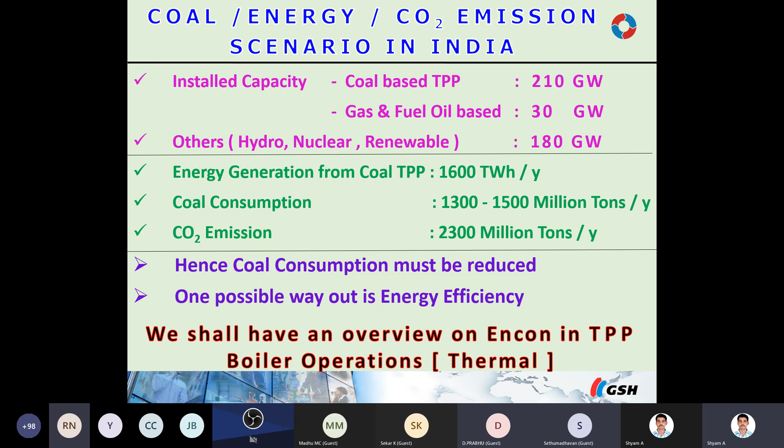We go on to the next one: way forward to achieve energy efficiency. One, establish the actual performance of the boiler in terms of thermal efficiency. Quantify various heat losses associated with boiler operation. And of course, make efforts to minimize the losses and sustain it. Total elimination is not possible, let's understand that.

So the idea is, let's try to establish the thermal efficiency of the power plant boilers, and once you do that, you will be able to understand the types of losses that take place, and also quantify the same. Once quantified, I think we can make our sincere efforts to reduce the losses. As I said, the losses are an inherent part of the system, so they cannot be made to zero. We shall try our best to minimize it.

So once that happens, naturally the coal consumption would come down, and once it comes down, you all know that emission is also going to come down.

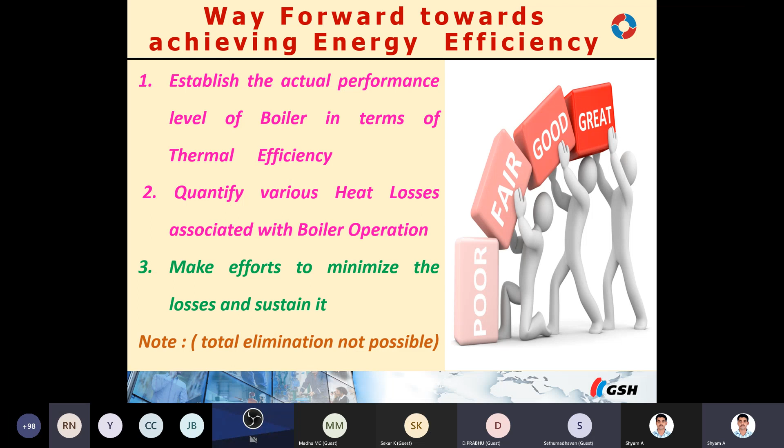Now these boilers are classified: high pressure, medium pressure, and low pressure. We will be talking about high pressure boiler thermal power plants. Whereas when you are talking about cogeneration sugar mills, they come under either MP or HP. I say MP or HP because the older versions of cogeneration boilers operate around 65 bar, that is 20 to 80 bar range, medium pressure. Of late, even the cogeneration boilers are getting designed for high pressure steam, so they come in 80 bar and above.

And the LP, that is 20 bar and less, they are all called low pressure, and they are basically classified as process boilers for process industries, where you need saturated steam for process application. In saturated steam, you all know that latent heat is higher and they are not getting superheated. So the maximum thermal energy conversion happens at the LP boilers.

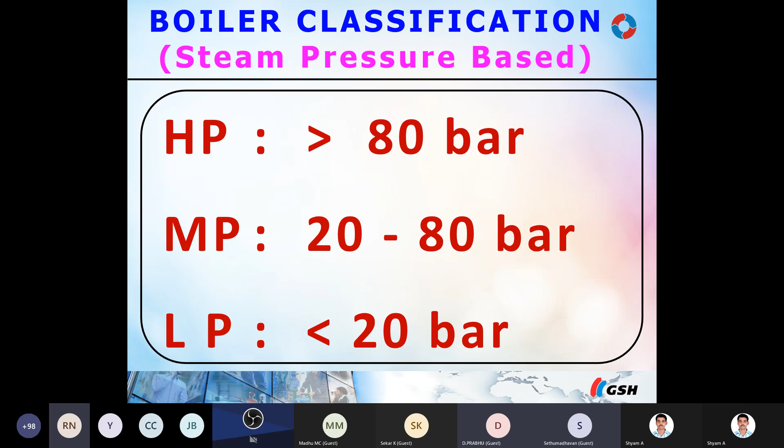So our focus is now going to be on HP-MP boilers, that is power plant boilers. This is a typical boiler circuit. This can be applied even to process boilers. You have the boiler, fuel coming from the storage yard, and then we have the water circuit.

Like you can see the condensate tank on the left hand side, then you have the deaerator, you have an economizer, and on the right top, steam to the facility. And flue gas path, you can see the FD fan. Then the flue gases go via the economizer, then you have pollution control equipment, and then to the stack.

So there will be 3 or 4 distinct circuits in the boiler operation, be it process or power plant, and each circuit has to be separately dealt with to understand their efficiency of operation. Once that is understood, I think we are done in terms of understanding the possible efficiency enhancement in the thermal operation of the boiler.

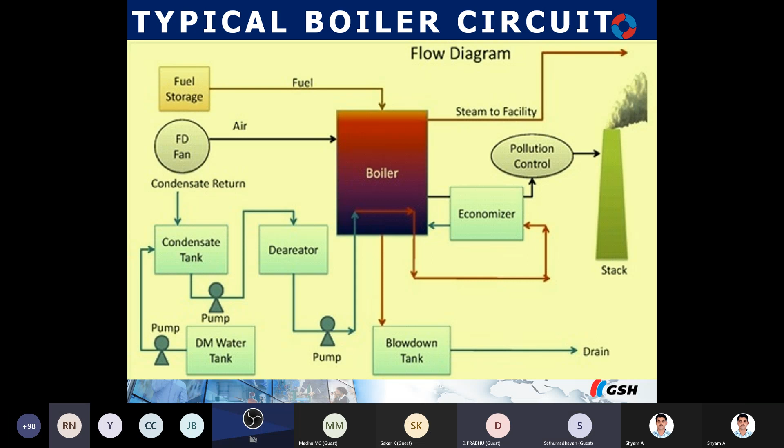Yeah, this is the other way of looking at that. You can see that the dotted ones: there is an air circuit, there is a fuel circuit, there is a feed water system, and there is a stack circuit. Because each one has a role to play. We all know that basic stoichiometry talks about supply of oxygen for the fuel.

Fuel we call it because it has energy content in it, what we call as calorific value. The calorific value comes from carbon and hydrogen present in the fuel, and that's why we call it hydrocarbons. When the hydrogen percentage is substantial compared to carbon, then the fuels are very specifically designated as hydrocarbons.

That's why we see all the petroleum fuels termed as hydrocarbons, because they go through the refining process and come out with gases like C1H4, what you call methane, C2H6, C3H8, C4H10, C5H12. These are all hydrocarbons like methane, ethane, propane, butane, pentane, hexane, so on and so forth. So that is the fuel.

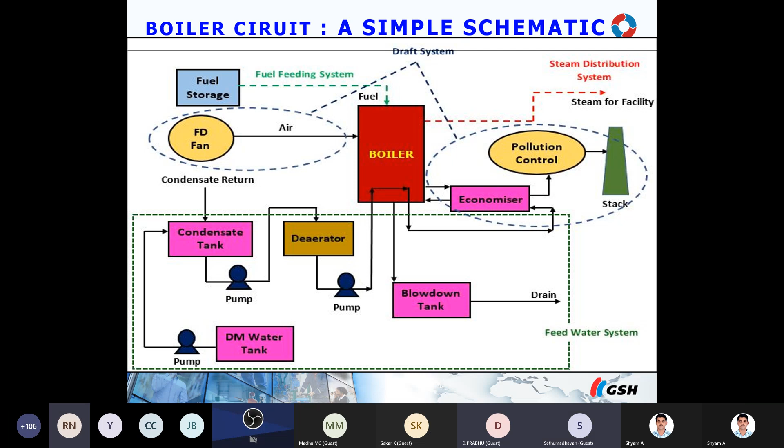So this is how the overall system would look like. Again, you can see that the superheater is another thing added to the power plant, and there is a turbine. Superheater is another system which you will find very specifically in the power plant boiler, not really in process boilers.

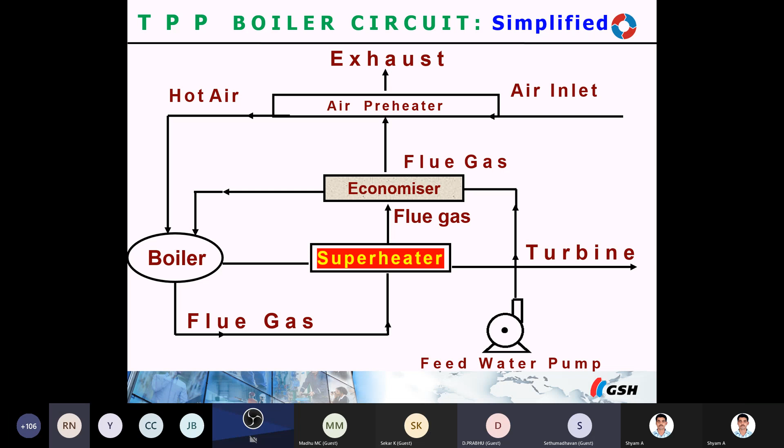And this is the extended version, and here if you see, I have mentioned this as the flue gas circuit. As I said earlier, the energy loss in combustion is mainly due to the energy going out in the flue gas. And of course it cannot be made to zero. We need to ensure that the energy going out of the circuit is the minimum. For example, you can see there is the stack, and from the stack we should get the flue gas, not only in terms of quantity but also in terms of quality, that is, the unburns as well as the temperature, they should be at an absolute minimum.

Unburnt content should be as low as possible, and of course the temperature should also be as minimum as possible, so that it doesn't affect the chimney. If that is taken care of, I think the performance of the boiler would certainly go higher. And if you see the flue gas part, there is an economizer, there is an air preheater. Then we have the ESP, you can see a box-like thing, that's the electrostatic precipitator. These are all very specific to power plants. And then we have an ID fan and a chimney. Why specific to power plant?

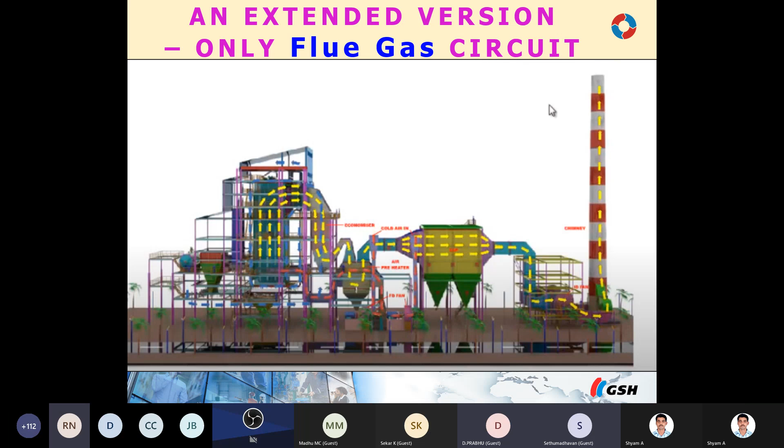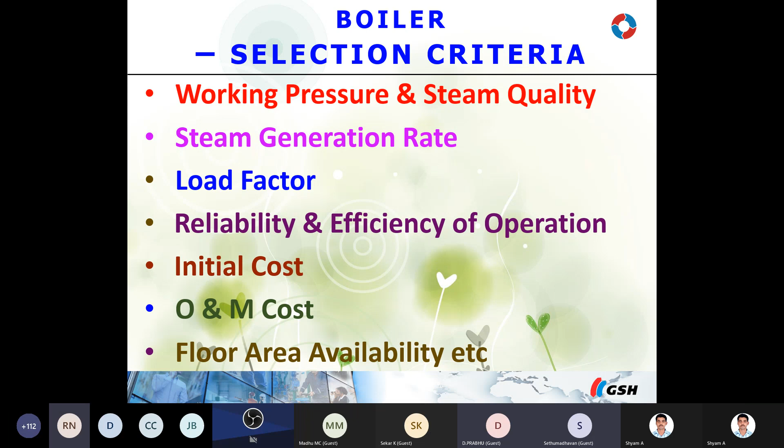Now the fundamentals required to understand boiler performance are: first, combustion chemistry of fuel; second, the fuel composition; and third, the steam properties and terminologies normally used. The combustion chemistry is also going to give you information about the flue gas. If these three things are understood, we may be able to proceed further in understanding the performance level of boilers, or the way to evaluate performance.

And again, I emphasize on focusing a lot on the fuel and the combustion, because if these two are taken care of properly, it is quite likely that your efficiency of operation would be much higher. The fuel is an important part of a thermal power plant, and not only thermal power plant, even for process industries. Process industries too generate steam, and the steam goes for various process operations.

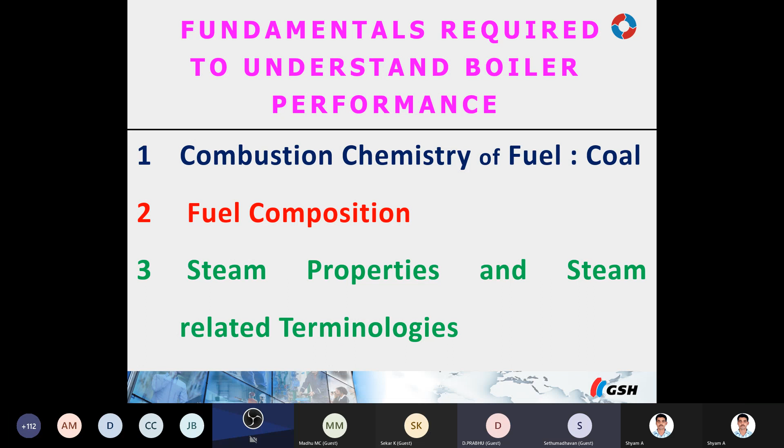Normally about 7 to 10 days of inventory is kept in a power plant. You would have read in the newspaper recently that there's a shortage of coal, and only 2 or 3 days of availability remains, etc.

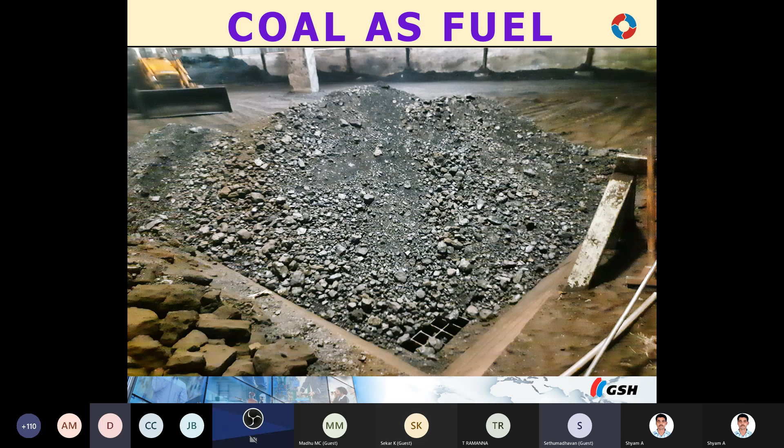So this is the coal as a fuel, and this is how the transportation takes place, normally by a belt conveyor. You must be wondering what is the need to show this. As I said, in coal combustion in a power plant, tons and tons of coal will be stored in the yard, and there will be losses in handling, which also go into the account of overall usage.

So the boiler may be efficient, but still your coal consumption could go higher because of improper, poor handling. There will be checkpoints in the power plant everywhere to ensure that coal is not wasted, or what they call spillages, or to be precise, carpet loss. These losses -- the coal not going into the boiler -- have to be kept at a minimum, normally 2 to 3% is allowed.

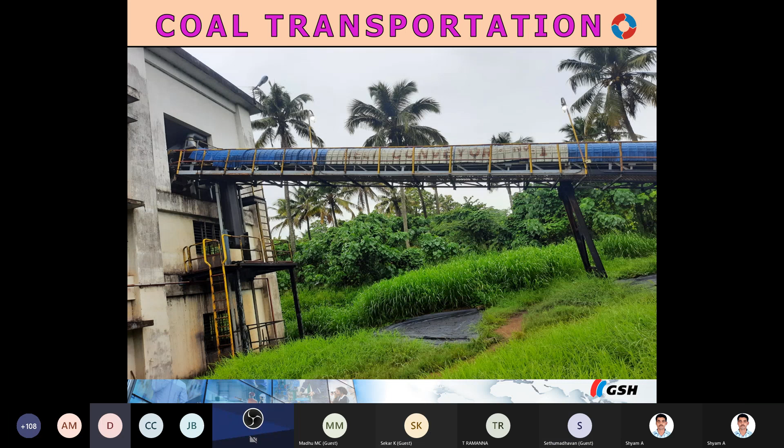You can see this is a belt conveyor, how neat it is, and on the sides also it's kept almost absolutely neat on a daily or shift basis to ensure nothing is lost. Another aspect to understand is the belts are made out of rubber, and spillages could be a fire hazard. They are in a closed system, so heat generation can happen, and once it catches fire, the belt gets damaged. Once the belt is damaged, fuel transportation cannot happen, and that can hamper the boiler performance.

As a practical engineer, we need to give consideration to all the aspects, not only the combustion part of the fuel. This is a typical example - you can see an absolutely clean environment is maintained around the coal belt, or the coal handling plant, to ensure that wastage is minimum and fire hazard is also mitigated.

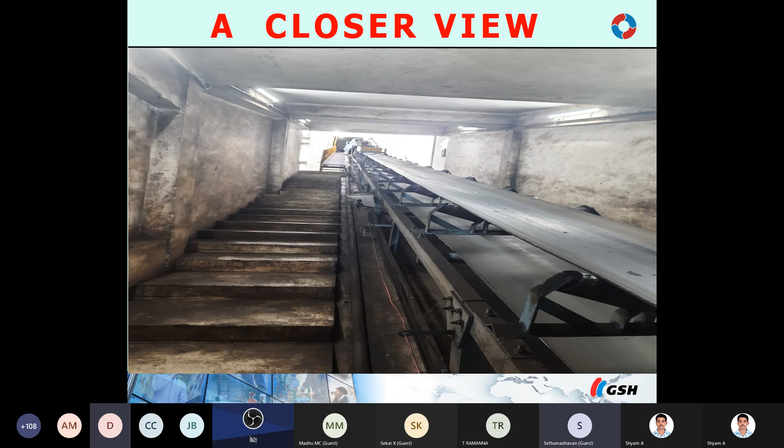This is the bunker, and there will be many bunkers depending on the size of the boiler, and these are all mechanically operated. The operation and maintenance of all these rotating machineries is again an important aspect, because the whole machinery operates in a dirty atmosphere with powdery fuel, and that could be a fire hazard. Second, it also makes the equipment operation bit sluggish, which can lead to motor coil burning, heat generation, and lesser heat dissipation.

There can be many things, and each and every part of the power plant is very important, so it is equally important that housekeeping is done very effectively so that performance is maintained. For coal feeding, right from the JCB up to the coal feeding, everything has to be in a clean atmosphere and has to be cleaned. If you visit a power plant, please do make a visit to the coal handling plant, not only the boiler, and look at the surroundings to see how clean they are. This indirectly helps the performance also.

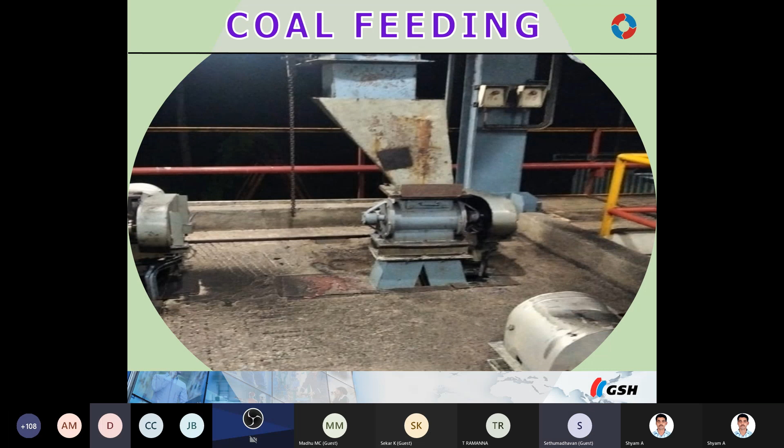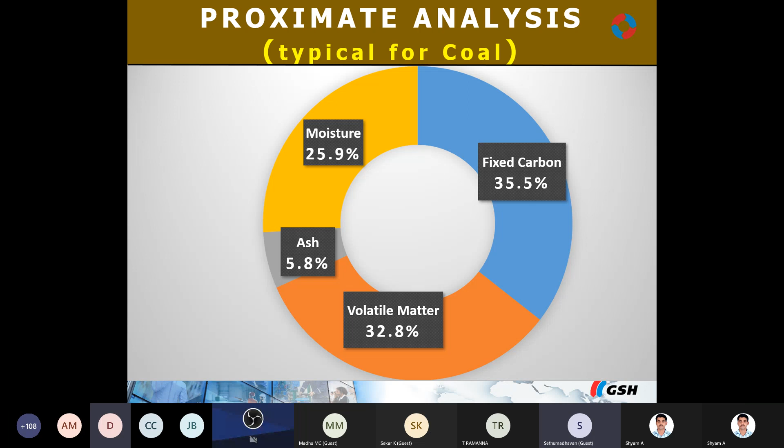Now coming to the coal - since you are all teachers, you must be knowing what is called proximate analysis, and the other one is ultimate analysis. The proximate analysis talks about the fixed carbon, volatile matter, ash, and moisture content of the fuel. Ultimate analysis, as the name suggests, breaks them into individual components like carbon, nitrogen, oxygen, sulfur, ash and moisture.

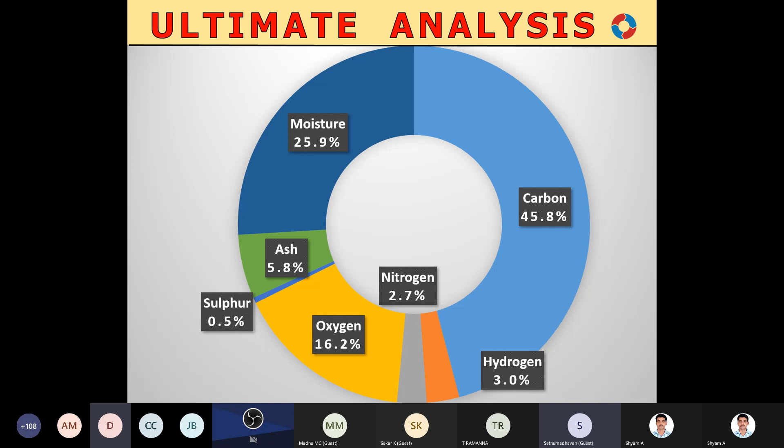This is for a typical coal sample. What do you mean by typical coal sample? It could be coal from any source - we will be seeing it a bit later. There are many terminologies used to define the quality of coal.

As received, air dried, as determined, ash and mineral matter free, so on and so forth. The moisture also has surface, inherent and residual moisture. Ash and volatile mineral matters form the overall mineral matter, and in the volatile you again have the organic. So there are many ways of defining a coal.

Many ways of defining a coal. The emphasis is more towards understanding the coal properties, because in power plants tons and tons of coal are being consumed, and the coal is also being procured in large vessels, I mean ships, and the smallest ship would be able to carry about 100,000, one lakh tons of coal.

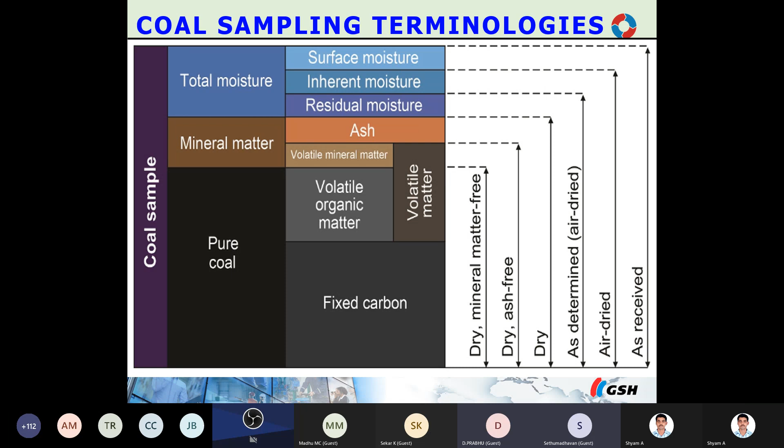So coal is well defined by the supplier as well as the user, and based on that they go for the purchase. There are 17 grades of coal, specific for power plants, from G1 to G17. G17 is as low as 2200 kilocalories per kg, and G1 grade could be 7000 and above.

So the question is, what is it that we are talking about? Which coal? Is it G1 or G5, G11, G14? And it varies from mine to mine as well as from country to country.

It's also obvious that the lower the calorific value, the lower will be the cost. When the cost is lower, of course, the quality is low, so steam generation also will be low, that is, the steam-fuel ratio will be less. So you may not get any cost advantage.

And many a times it may not be our choice on coal quality, because we need to buy what is available, since the quantity required is tons and lakhs of tons per year. So we need to live with what is available, considering the quality as well as the quantity, and try to improve performance with the given fuel quality.

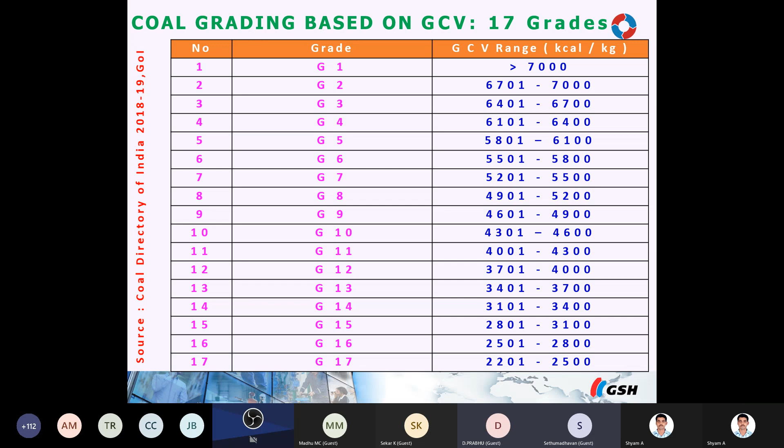You can see the table. Basically these are the 5 sources of coal as far as India, or rather Indian power plants, are concerned: Indonesian, South African, Australian, USA, and Indian.

Total moisture and ash content are very important parameters. Ash is one of the deciding parameters, because when the ash content is high, the energy transported per ton becomes lesser. When the ash content is high, the load on the dust collection equipment goes higher, which also consumes energy, and ash disposal becomes a nuisance to be taken care of. So industries look very seriously at the ash content.

The second one is moisture content. It's not as critical as ash, because moisture can be added or removed. A fluidized bed boiler can normally take up to 30% moisture and burn the fuel effectively, not a difficult task. If you see, ARB stands for as-received basis, and ADB stands for air-dry basis.

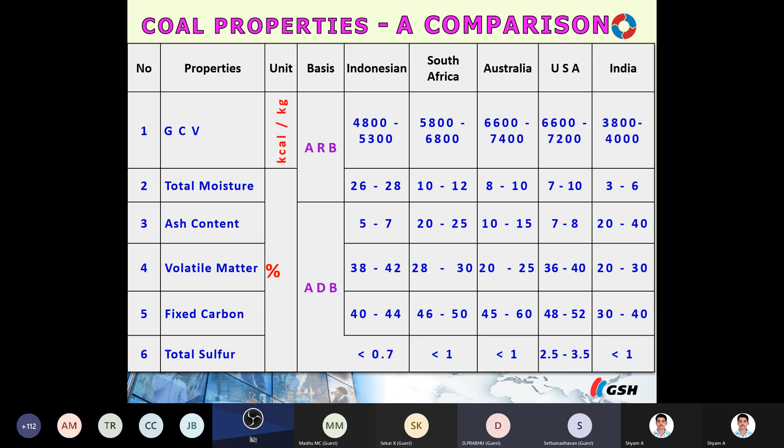So right now in India, Indonesian coal is used to a very high extent, and this is where, as you must have read about 2 months back, the crisis came, because all the Indonesian coal was being purchased by the Chinese government. So coal prices, you will be surprised, the Indonesian coal used to be about 5,500 rupees per ton, had gone as much as 15,000 rupees per ton.

And of course now the prices have softened to 7,000, but still not back to the level of 5,500. All power plants were finding it extremely difficult, and then they started mixing with Indian coal, although it has lower calorific value and high ash content, but still the cost was the factor. So it was mixed with Indonesian coal, and right now the situation is slowly coming back to normalcy. If you really look at it, Indonesian coal is the most preferred coal as far as Indian power plants as well as process industries are concerned.

This is the typical composition, which we call GAR. GAR is the terminology normally used by coal dealers and coal purchasers. GAR stands for GCV as received.

GCV, that is gross calorific value. A stands for as, R stands for received. So there are two grades as shown here, and there is one more grade, 5,200 GAR also. The calorific value GAR, 4,500 GAR, means it will have a GCV of 4,500 kilocalories per kg, and this is the moisture content, ash, volatile matter, so on and so forth. So this is how the coal is being selected.

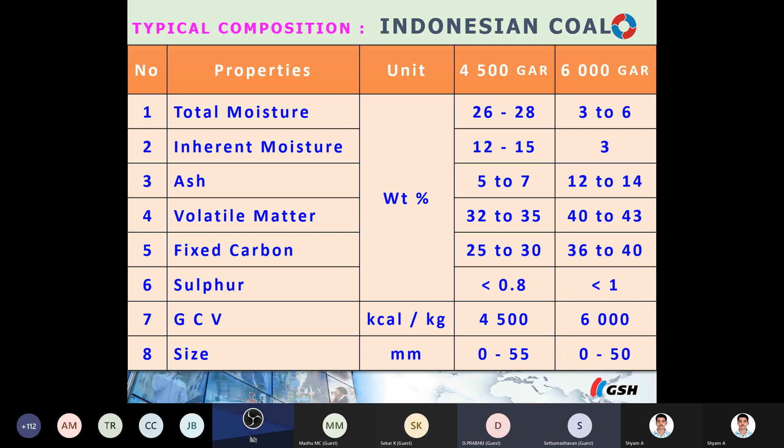And this is the typical representation. You may be thinking that I am spending more time on the coal or fuel related aspects, because I know that this is the most important parameter in a power plant operation. If the coal is not of the right quality, then you cannot achieve the efficiency.

So we also insist on all the power plants that before we go for the audit or before we certify the efficiency level, we completely get the parameters of the coal purchased.

Again, the coal purchase would go different quarter wise, because normally the coal prices go by the coal index in the international market, and they're all fixed for only one quarter basis. Every quarter there will be a change in the coal price, and when the coal price changes, the commercial department of the power plant may look for a cheaper coal because they would like to freeze the cost, so they may go for a cheaper coal. And you all know that when you go for a cheaper coal, the performance gets a hit.

So when we do the energy audit, we not only look at the process parameters and efficiency of boiler operation, we also get the analysis of the coal and type of coal used, and cost of coal used in the previous 12 months minimum. We normally go for 24 months, based on which we try to establish the performance.

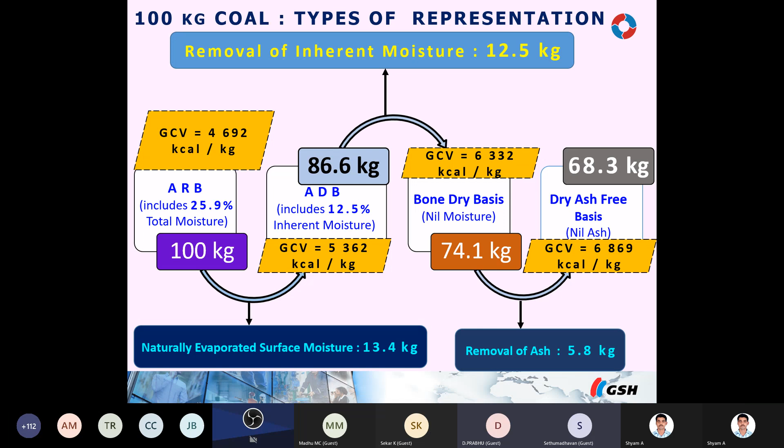In addition, moisture also can get added, because mostly coal is transported from country to country by sea. While shipping, it has to travel days and days on sea, and moisture pickup will be there. So normally it's at the port at which it is unloaded that the sample is taken and the performance is analyzed, based on which the cost is fixed. So moisture can play a role in coal cost as well as performance. As moisture content increases, the calorific value comes down, which of course all of us know.

Then come to the combustion aspect of that: the excess air, stoichiometric air, and substoichiometric air. As far as combustion is concerned, it is more the excess air that goes into the combustion.

Substoichiometric air is used for the gasification process, where we don't supply the required quantity of air but some percentage of the theoretical air, less than 100%. Stoichiometric air is the right quantity, 100%. Whereas in actual practice we incorporate a safety factor, so if 100 kg is the theoretical air required, we may supply more than that.

This excess depends on the type of fuel - not only quality but whether it's gaseous, solid, or liquid. Solid fuel calls for higher excess air, about 30 to 40%, as low as 5 to 8% for gaseous fuel, and about 20 to 25% for liquid fuel.

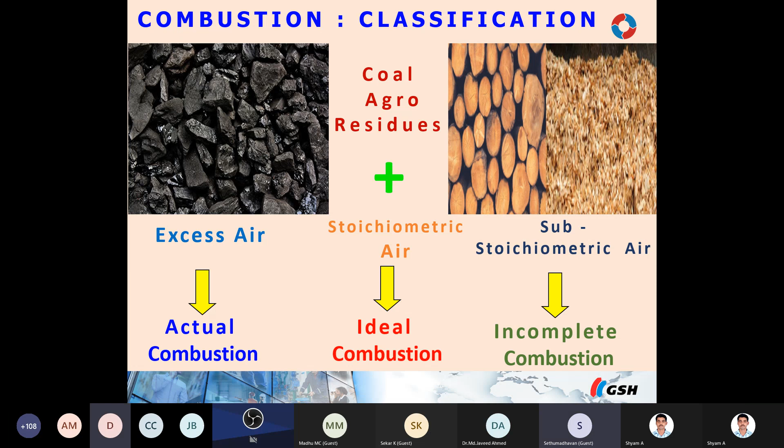Here you can see a visual observation. Complete combustion is almost colorless, but in fact it should be slightly hazy brown - it should not be completely colorless either. Colorless says combustion is good, but it also means excess air is on the higher side.

On the right hand side, it's an incomplete combustion - you can see black smoke coming out. The black smoke is nothing but the presence of carbon, which indicates that energy is lost in the flue gas, goes unburned, and also results in pollution of the atmosphere.

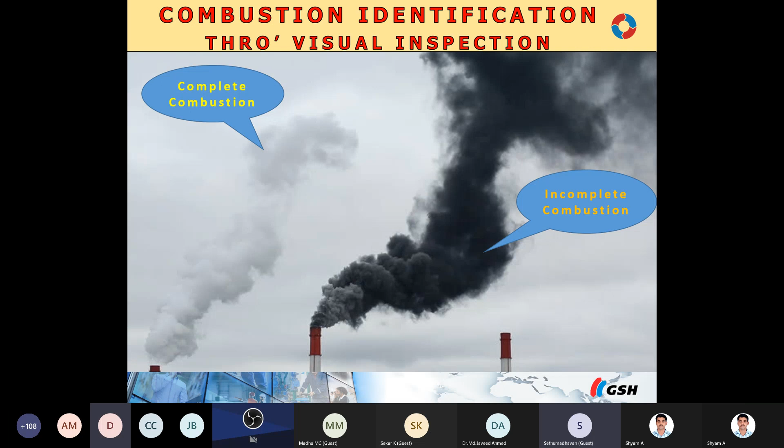Now the steam related aspects. We've seen parameters related to coal selection, and combustion related aspects, especially excess air. The third input parameter, since we've talked about coal and air, is the water that comes out of the boiler as steam. Let's see the steam related parameters - one is the equivalent evaporation.

You must have seen this in second or third year heat transfer, power plant, or boilers courses. It is the quantity of dry saturated steam generated per unit time - second, minute, or hour - from feed water at 100 degrees centigrade to the saturation pressure corresponding to 100 degrees centigrade. This is equivalent evaporation, also called from and at 100 degrees - the terminology normally used on the boiler nameplate. If it says 10 TPH, 10 tons of steam per hour, that's what the nameplate indicates.

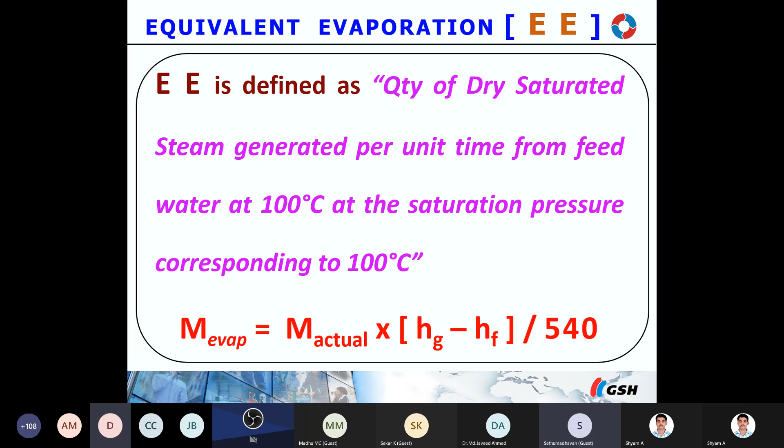The nameplate suggests information under standard condition, whereas that has to be modified to the operating condition. This is what we call equivalent evaporation, and this is the factor of evaporation, based on steam enthalpy and water enthalpy. If water is at 40 degrees centigrade and steam is at 170, the energy required would be 660 kilocalories, not 540. So the steam generation would be 540 by 660, maybe 80% of the nameplate steam generation. So a 5 tons boiler can give you only 4 tons. We need to understand this equivalent evaporation as well as the factor of evaporation.

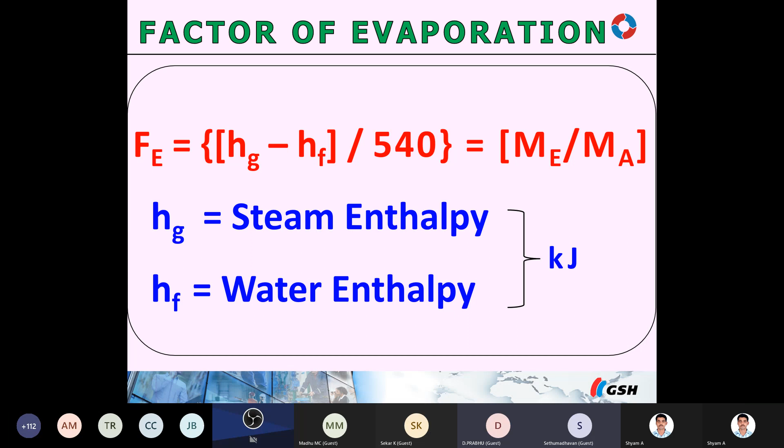Now comes the key performance indicators. Of course, you may not find this in the typical textbook, but these are all quite relevant to industrial application.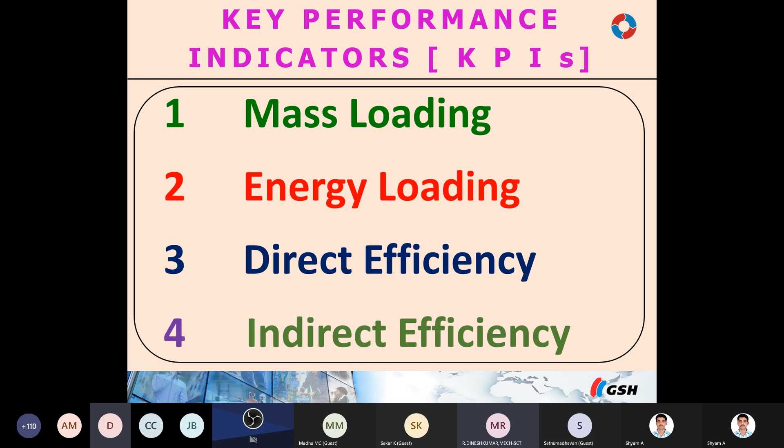Now, what is mass loading? Mass loading.

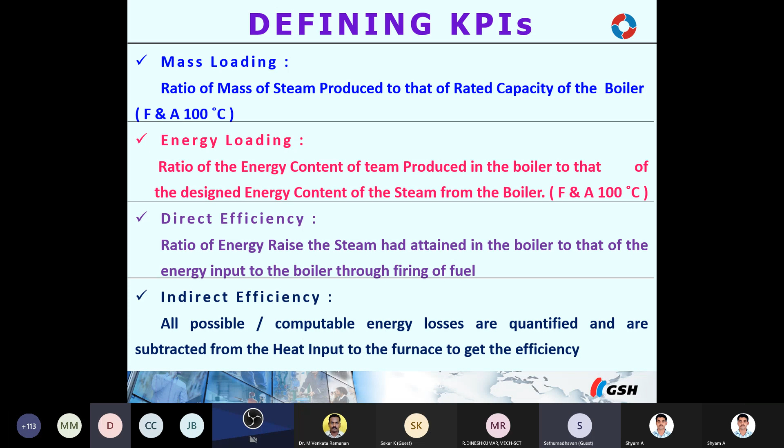Coming to mass or energy loading, which one should we follow? Mass loading is not the right indicator, and energy loading is considered the right parameter, the true indicator of the boiler loading pattern. This all of us should be very clear about, because mass loading from and at 100 degrees centigrade of the boiler rating is meant only for selection of boiler. With that, its usefulness stops. Whereas in reality, we need to understand what is the energy being delivered by the boiler.

Here again, slightly different, or not found in the textbook. Steam is nothing but a carrier of energy, a courier also we can call it. Its job is to capture the energy of the fuel, that is the coal GCV, and take the energy to the user point, dump the energy there, and come back to the combustion zone, again pick up energy, go back, give it, come back. So steam as such is nothing but a carrier of energy, and the more energy it carries, the higher would be the capacity of the boiler.

We are not really interested in the quantity of steam, but the quality of steam, or the energy content of steam. Energy content of the steam should be high, that's why we go for superheating also. So what really matters is the energy that is getting transported by the steam. Energy loading is the true indicator of the loading pattern of the boiler, not really the mass.

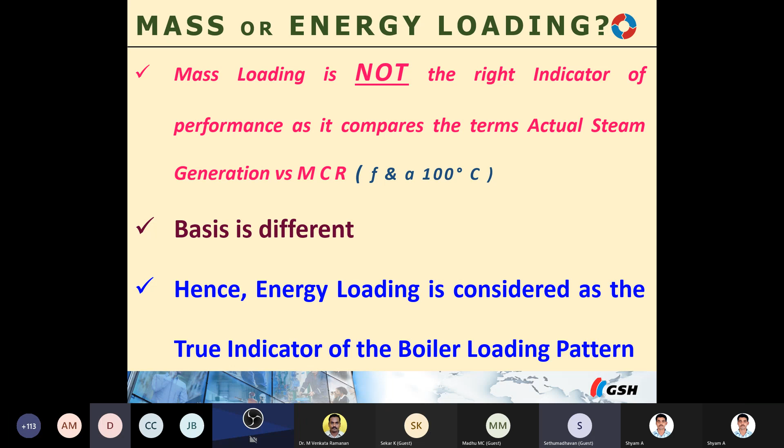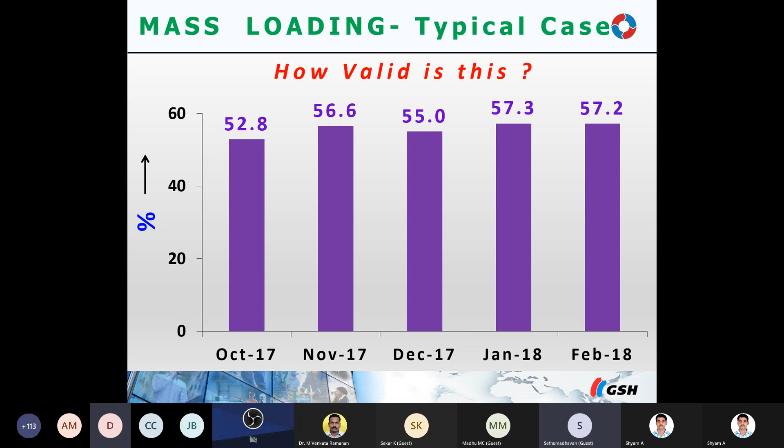If the boiler is poorly loaded, the efficiency also will be less, because when you do the loss analysis, you will see that the loss becomes 25%. Then you say efficiency 75% is low. Yes, 75% is low, but a partial reason would be loading of the boiler. So the energy loading has to be evaluated by the boiler.

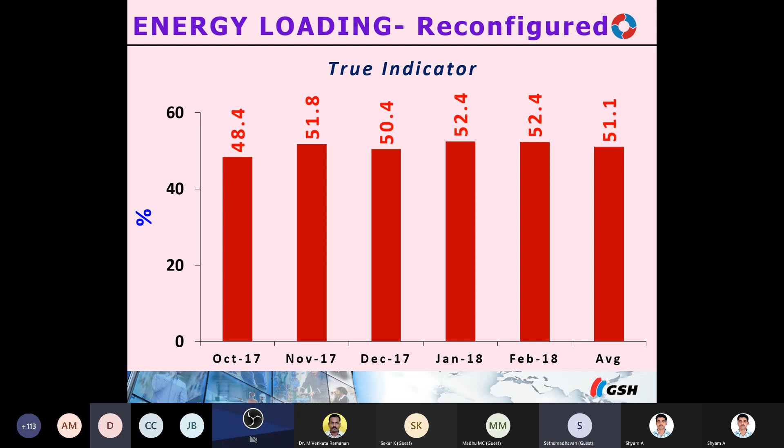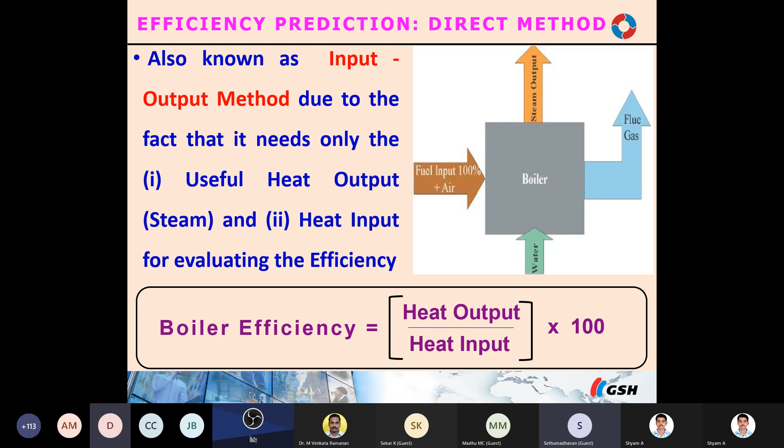Once you do that, we go for the performance prediction: direct method as well as indirect method. The direct method is known as the input-output method, where you need useful heat output and heat input for performance evaluation: heat output by heat input into 100. The other one is indirect efficiency, known as the heat loss method, following standards like BS 845, ASME PTC 4, IS 8753. When we do the performance study of the boiler, we need to follow any of these standards to evaluate the boiler performance.

This points to the heat loss method, where we list out various types of energy loss that are taking place, and establish the numbers through proper instrumentation. All the losses are precisely predicted, and then we arrive at the efficiency by summing up all the losses in terms of percentage and subtracting it from 100. So this is known as the heat loss method.

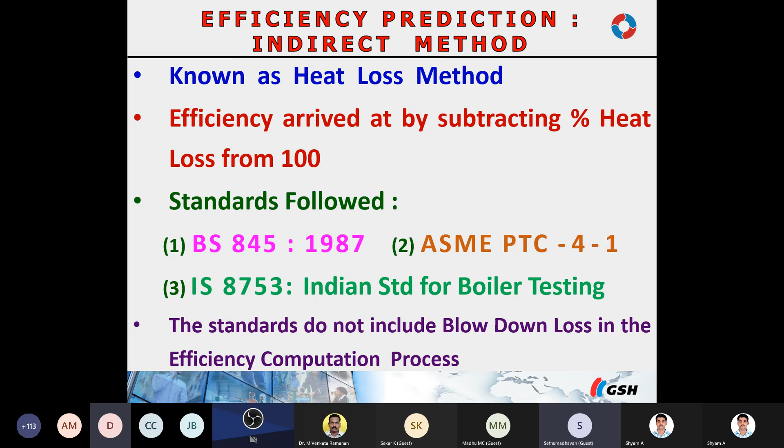Now the question is, which is more reliable? Indirect method is more reliable because it does not leave anything for chance. Whereas when you go for the direct method, it starts with the MS steam flow rate. Now there are steam flow meters available online, but again the steam flow meters will have to be calibrated on a year-on-year basis, and they also need to be calibrated with reference to the steam parameters simulated.

If it's a dryness fraction of 98% or 97%, steam pressure is it 64 atta, 52 atta, or 108 atta, the calibration of the meters will have to be done for the conditions we will be encountering in process operation, which is again going to be a tough exercise.

Establishing the steam flow rate precisely on a day-to-day operation is not an easier job, and steam flow meters need to be very accurate, which can be quite expensive. Further, they also need regular calibration, whereas in the indirect method we can measure all the parameters very precisely with simple normal instrumentation, leaving nothing to chance. This is what's most preferred by industries.

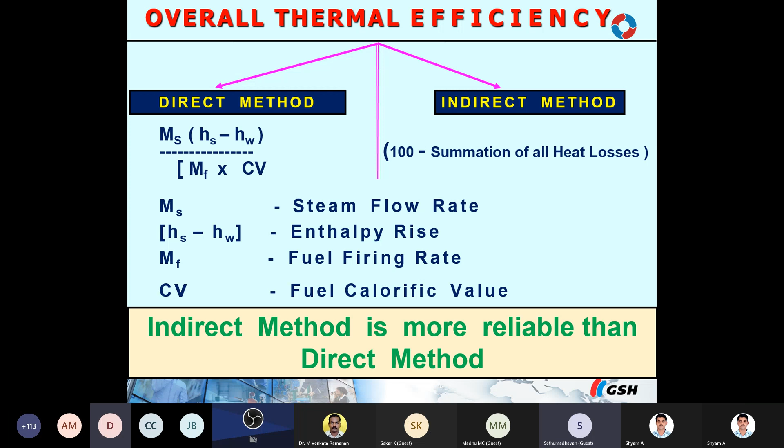In addition, in power plants we have all the parameters available on the dashboard, which also monitors the efficiency regularly. So the performance evaluation of thermal power plant boilers may be an involved task, but it's a kind of task which is quite simpler. It may be time consuming, but it's simpler because of the good instrumentation normally found in thermal power plant boilers.

Heat balance - this is the methodology we need to adopt while defining the heat balance: the Sankey diagram. Normally we should not use pie charts or any other method of establishing or projecting the performance level. This is the internationally accepted method of projecting performance.

In a Sankey diagram, the width of the arrow corresponds to the percentage value - higher the width, higher the value. So the steam output should have a much bigger width so that the percentage is more. Fuel input is 100%, and steam output depends on what the quantity and quality are. This is the Sankey diagram for the heat balance.

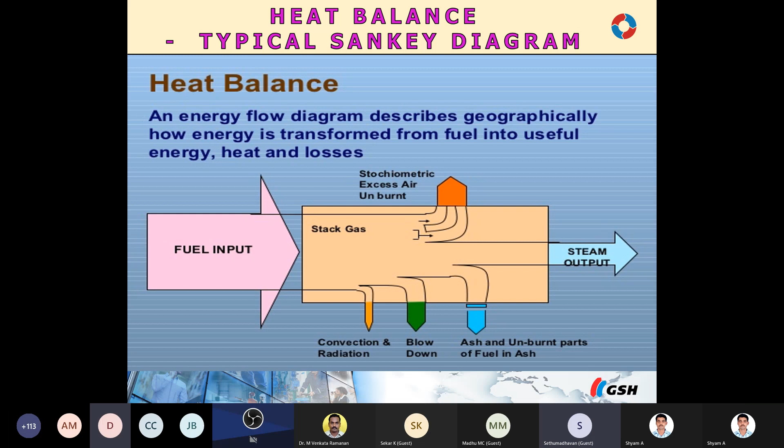Coming to the losses, normally there are 7, and we classify them into major and minor. Major would be the dry flue gas loss, then the heat loss due to moisture. That moisture could come from burning of the hydrogen in the fuel - we know fuel contains carbon and hydrogen. C goes as CO2, H2 goes as H2O. So hydrogen getting converted into moisture is a loss, because in that conversion it absorbs latent heat.

Then you have the heat loss due to moisture in fuel - fuel would come with moisture, which we've seen earlier, like coal with 30% moisture, 28% moisture, etc. Air also will have moisture depending on the humidity level, so that also would be a loss. And of course the convection and radiation losses. So these are all the major losses we classify.

Major, I mean unavoidable losses - in this sense these losses are unavoidable, and we should also try to make them as minimal as possible. A lot of effort needs to be put in.

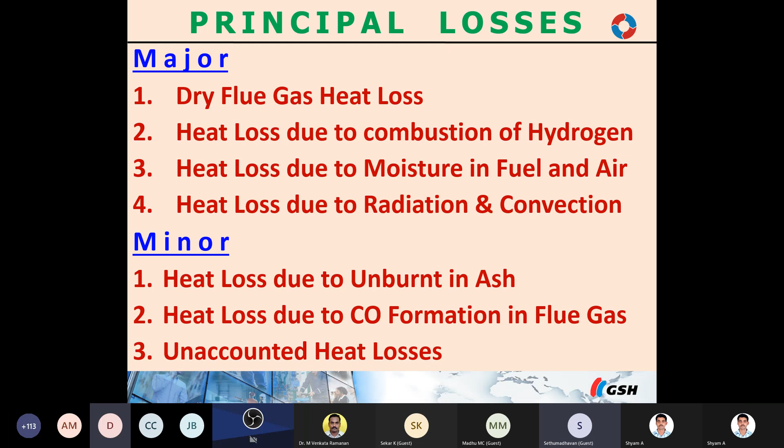And what parameters? Fuel composition. Now you can recollect the quality of coal we were talking about, and we say there are 17 types.

There are 17 calorific values, and 17 calorific values will have 17 fuel compositions. The 17 fuel compositions will require 17 different quantities of air for combustion. So we need to go to the second level of stoichiometric combustion, excess air level, distribution, fuel composition, and firing rate we need to establish.

Then what is the CO2, O2, CO in the flue gas during operation, we have to establish. Then the temperatures of the various streams like feed water, combustion air, flue gas, steam, pressure, temperature, O2 profile, and ash quantity collected at various locations and points.

It could be at the economizer bottom. In the combustion zone also you have zone 1, 2, 3 bottoms. Then you have the air preheater bottom portion. In the ESP, electrostatic precipitator, again you will have zone 1, 2, 3. So in a power plant, you will be collecting ash from about 8 to 10 locations.

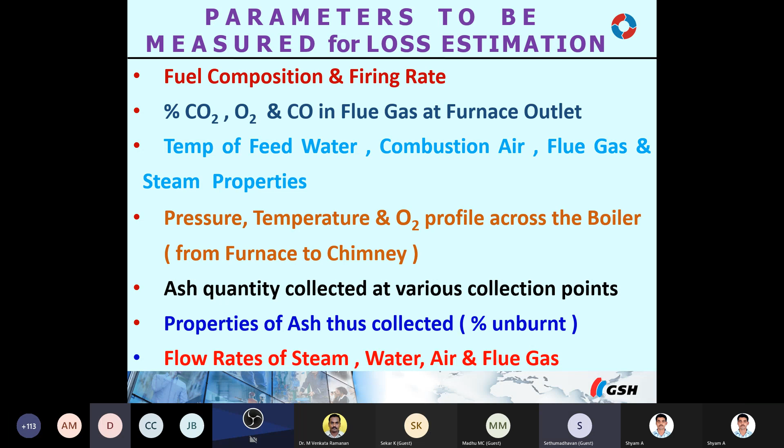This is a typical one - pressure profile across downstream equipment: furnace, bank zone, economizer inlet, economizer outlet, air preheater, electrostatic precipitators, chimney outlet.

Because all these parameters are in negative pressure, and it will go to positive at the chimney, the more negative it is, any air leakage can dilute the flue gas composition, because these are all under negative pressure right up to the ID fan suction. So it is equally important that air ingress is not permitted.

Again, as I said, operating the boiler at the right level is equally important, and equal importance should be given as we give to fuel quality. So we need to establish the pressure profile also across various downstream equipment.

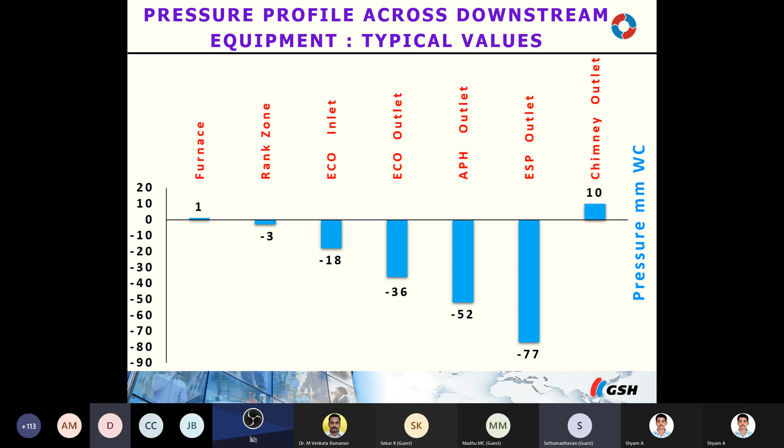Similarly, the oxygen content - you can see it ranges 5 to 9.5, which clearly indicates that air is getting ingress at various locations, and the temperature of the flue gas also comes down - 450, 260, 162. These are all things that indicate air is going into the system, and we need to arrest that.

So these parameters will have to be evaluated regularly during the campaign period, maybe once every hour or once every 2 hours. These parameters will have to be recorded and noted.

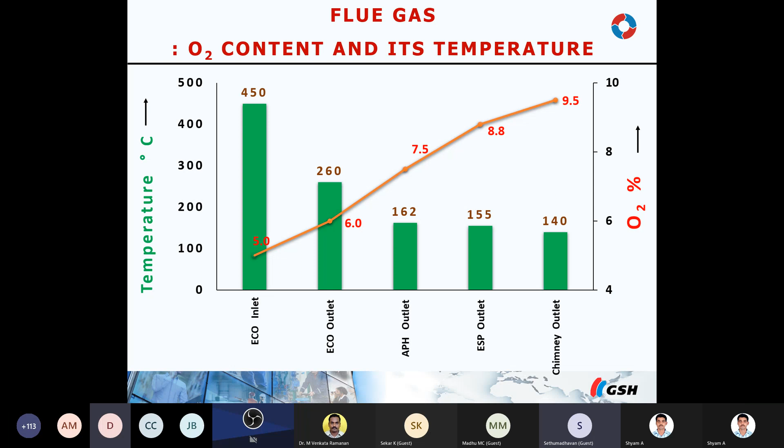Another one, you can see the oxygen percentage and the air flow rate in tons per hour. Oxygen percentage varies as high as 10.79. You can see it is also a function of the steam flow - when the boiler is loaded heavily, the O2 level comes down.

It keeps on varying - O2 level in the flue gas does not follow any pattern, and it's quite varied. These parameters will have to be captured, and then we need to analyze the variation so that we may get some input on that.

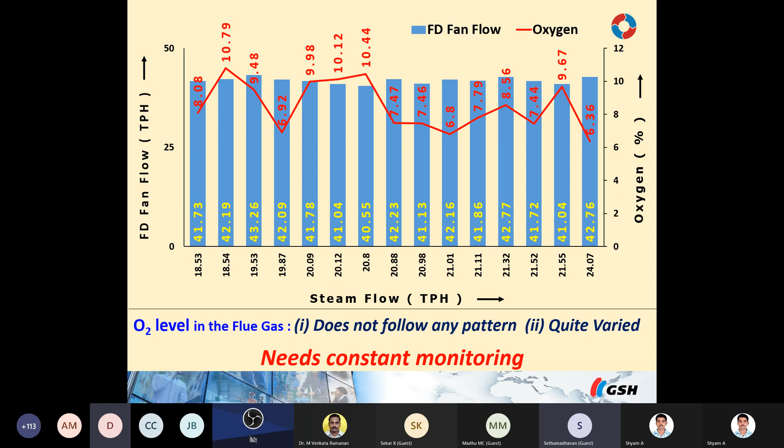The reason is these two: fuel hydrogen and dry flue gas loss. Since we supply excess air, there is a flue gas loss. And since the fuel has inherent moisture, because it is mined from the mines, moisture would be there, and surface moisture too as it picks up. These two losses cannot be avoided, only minimized. If these two losses put together in percentage are less than 10, I think we have achieved our goal. Fuel hydrogen cannot be 2%, or dry flue gas loss cannot be 2%.

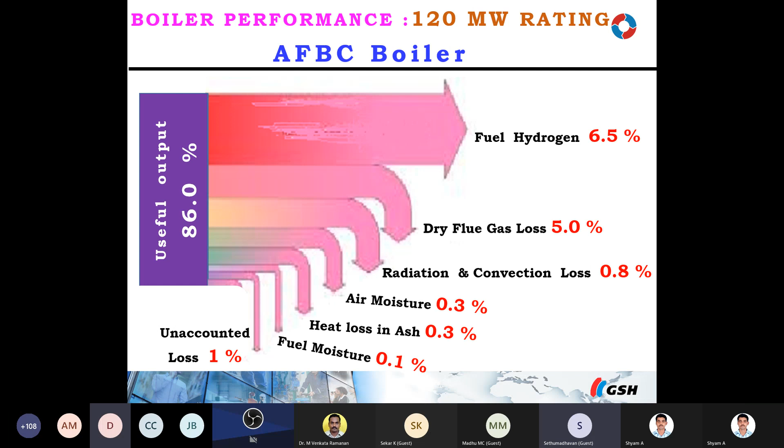And this is how, for a 500 megawatt plant, we mean the output of the generator is 500, and we see that boiler loss is 151 megawatt, input is 1428. This is 10.6% boiler losses. So 90%, and you have the condenser loss, turbine generator, work auxiliaries. Ultimately you get 35% as the overall, in the sense coal to power. Coal to power is 35%.

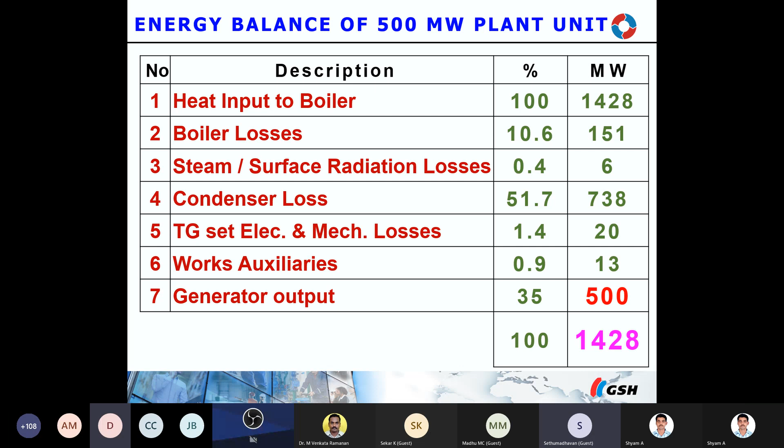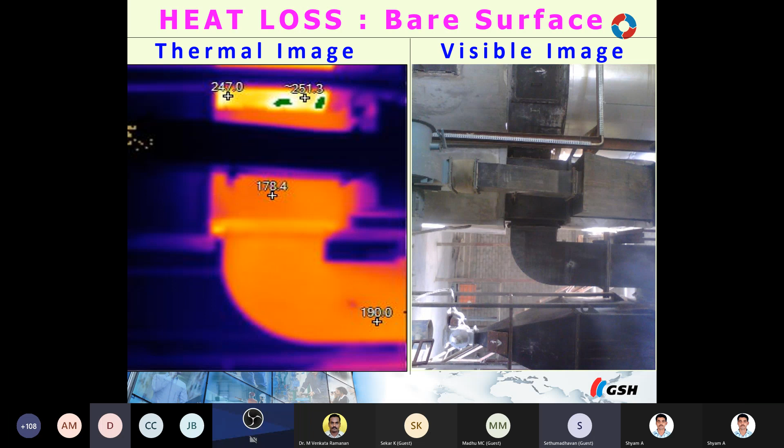This is a regular exercise done once a year. Thermal images will be captured in the entire steam line to make sure the losses are as minimal as possible. This is a typical bare surface. Similarly for inadequate insulation, over a period of time, because these boilers operate for 350 days minimum - 15 days is a mandatory inspection period - so 350 days and 24 hours, they operate for 8,500 hours in a year. Being an abrasive fuel, coal, there is a possibility that insulation gets damaged, so it needs to be rectified. So the entire boiler will be thermally studied, imaged for all the hot parts, and the losses also would be brought down.

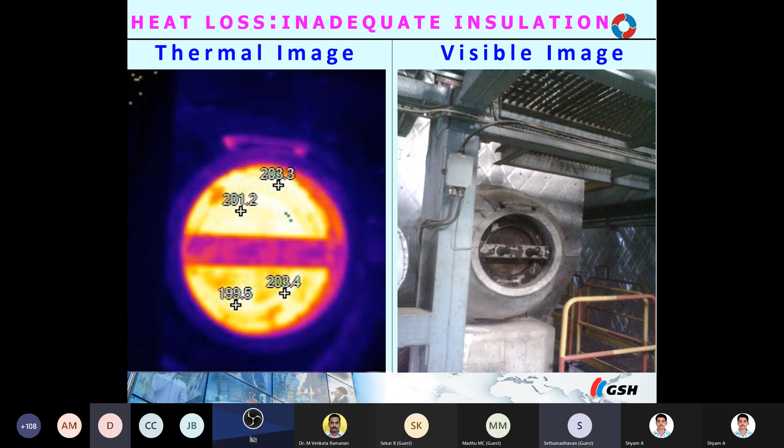What do we conclude? Typically power plant boilers operate at efficiencies exceeding 85%. However, overall efficiency is only 35%. This is the benchmark value. Coal consumption should be upward of 0.65. This is called the heat rate of the power plant. A good value will be less than 2500 kilocalories per unit of power generated.

If you look at it, in India we have more than 100 power plants. If the power plant's performance has to be compared, it is done using the parameter heat rate. For that matter, take the case of Tuticorin power plant, Mettur thermal power plant, North Madras Ennore. How do we compare the performance? Heat rate is the performance indicator, because each plant may have a different quality of fuel used depending on the cost and availability, so thermal efficiency will not be the right indicator. The performance of power plants is indicated by the heat rate - that is kilocalories per unit of power, that is energy generated, heat rate.

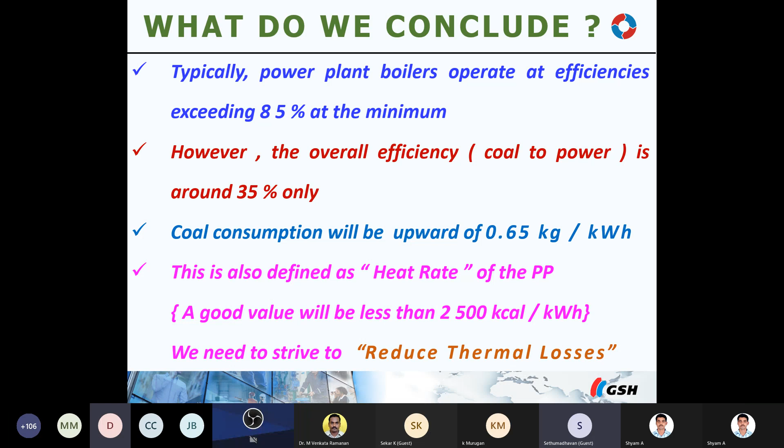The 85% should be the benchmark, and 90 could be the maximum we can achieve. You can see that for different months, the typical coal consumption goes say 0.57, 56, 55. It has gone as high as 0.60. Look at that, the lowest is 0.55, highest is 0.6, but still it could make a lot of difference.

In terms of cost, when it is 0.55 or 0.6, again we need to do RCA, root cause analysis, because 0.55 and 0.6 is almost 10% more. That 10% could be a tremendous number in terms of cost, so we need to understand why it has gone up. And the benchmark value could be

0.57 total. With reference to export, it is 0.63, because we know that 100% of the power generated cannot be exported, since the power generated would go for internal consumption also. So if you consider the internal consumption as unavoidable energy, and take into account only the power that is exported, you see that it has gone to 0.63. This is how the benchmarking has to be done.

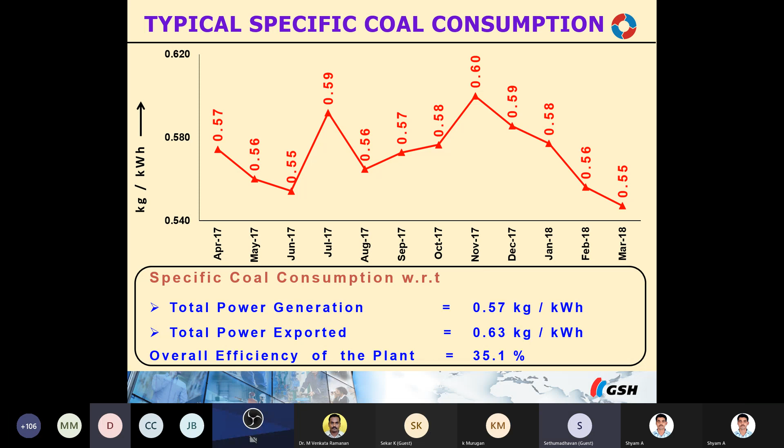And what are the activities to be done to get better performance? I think I have 10 more minutes. Control of fineness of the fuel, control of excess air, accuracy of O2.

In many power plants, the O2 is the parameter which will be displayed in the control room, displayed like a photograph on online monitoring, so that every second it will be showing the O2 value. This itself can tell you how important the O2 value is in the flue gas circuit. So this is one of the most important parameters that is monitored every minute. Then heat transfer area must be kept clean.

Air leakage - we have seen the pressure profile, O2 profile, they are all done to keep air leakage to the minimum. Controlling the flue gas temperature leaving the stack - when the economizer or air preheater, the heat recovery system, fail to perform properly due to ash deposits or any other reason, the performance would come down, the stack temperature would go high. So when the stack temperature is more, again we need to carry out cleaning activities of the heat recovery equipment.

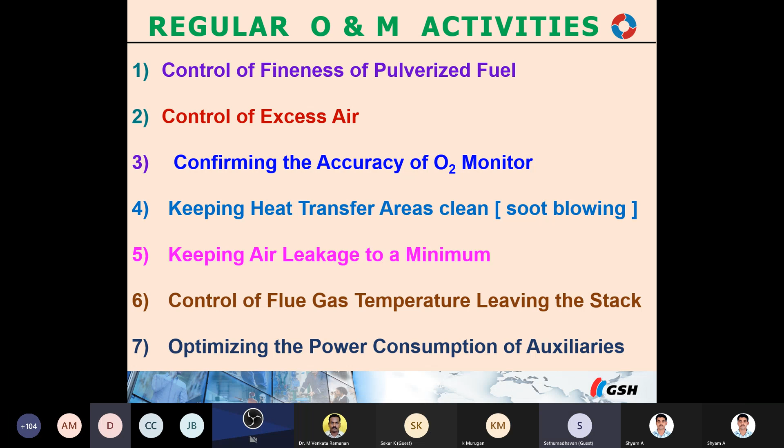Optimizing the power consumption of auxiliaries, which you are going to see later, feed water preheating, combustion air preheating, excess air control, minimization of combustion and stack temperature control, etc., will have to be taken care of for improving the performance.

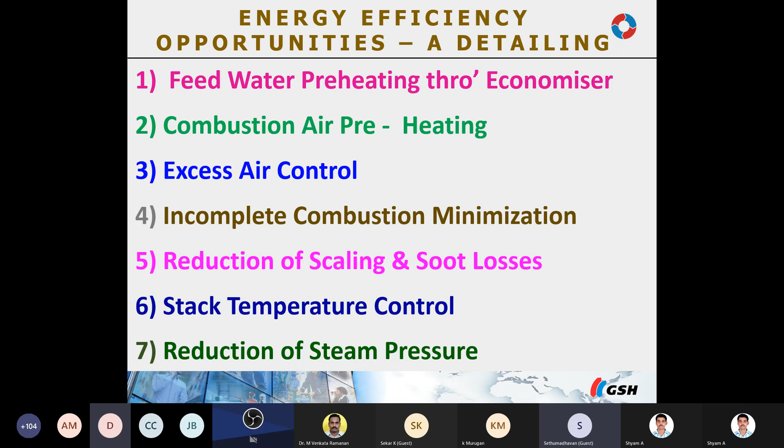Of course, radiation and convection losses, boiler loading - again, if the boiler is not properly loaded, the percentage loss would go higher. So if it is operating inefficiently or the efficiency is lower, we need to go back and see what is the loading pattern, and get from the OEM, the equipment supplier, to find out what is the effect of loading on the performance of the boiler.

That also needs to be taken into account, and then the boiler scheduling - too many stoppages again would result in higher coal consumption, which will also go as a part of the fuel consumption against steam generation. So if the boiler scheduling is not done properly, and loading variation is very high during a day, performance also would come down. So these are all the areas to be taken care of.

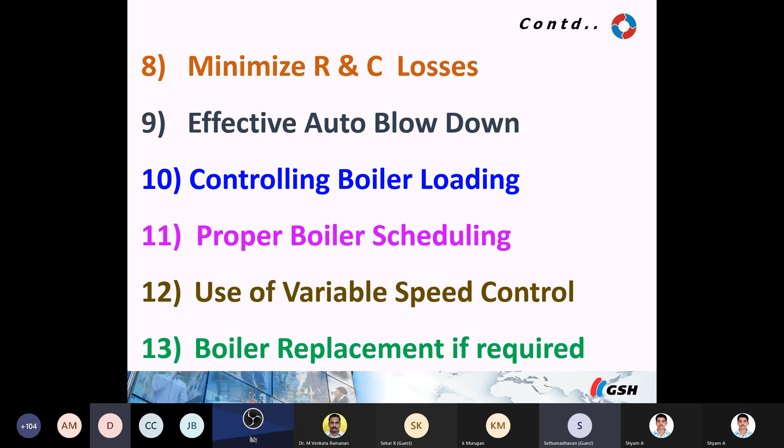In the sense, I put 1.5% increase in efficiency, based on my experience with various power plants of various capacities from as low as 100 megawatt to as high as 500 megawatt single unit. These are called ultra power plants, because normally power plants of 210 megawatt into 4 units, 5 units, would be evaluated for their performance at loads of 75%, 85% and 100%. They will be evaluated for performance at 4500, 5200 and 6000 kcal.

In this sense, a lot of studies we have done - it has to be done in a boiler to arrive at the optimum level, and from that experience we found that efficiency increase of 1.5% is really a good achievement for a standard, normally well-operated boiler.

A thermal power plant boiler has an efficiency varying between 85% to 90%. Aiming beyond 90 is not easy, and going below 85 is certainly not acceptable. These are the two extreme numbers. To maintain efficiency within these limits, we need to understand fuel properties, steam properties, air quality, air quantity, measurement of various parameters, and regular monitoring.